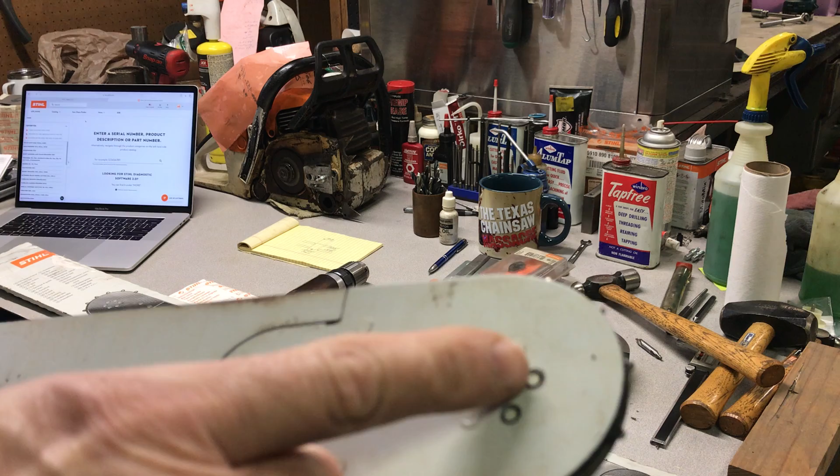All right, here we go. Take a look here, you can see that the sprocket nose has been pinched and then pried open. And we've got two broken rivets here, so this nose is worthless.

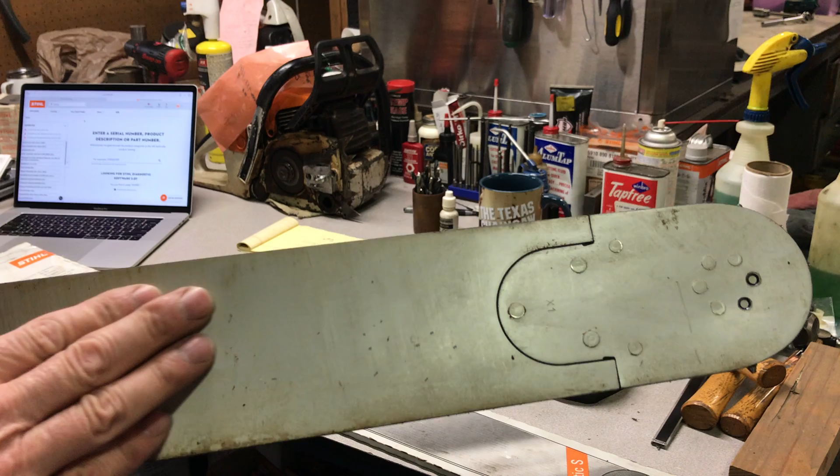This is what's called an ES Rollomatic, and RSN stands for Replaceable Sprocket Nose, which means we can replace this part and there's no damage to the bar body. The bar body is not bent, so it'll be as good as new.

Okay, we'll bring you in for a bit of computer work here. So we're in the parts lookup, and we pick chainsaws, then we pick guide bars. Let's take a look at ES404 right there, and this is a 41-inch, yeah, that's the right part number.

It doesn't have a nose number there. And we're going to go to, okay, number 1. So that's the part number for the replacement nose: 3003-650-2538, and that's what I've got here.

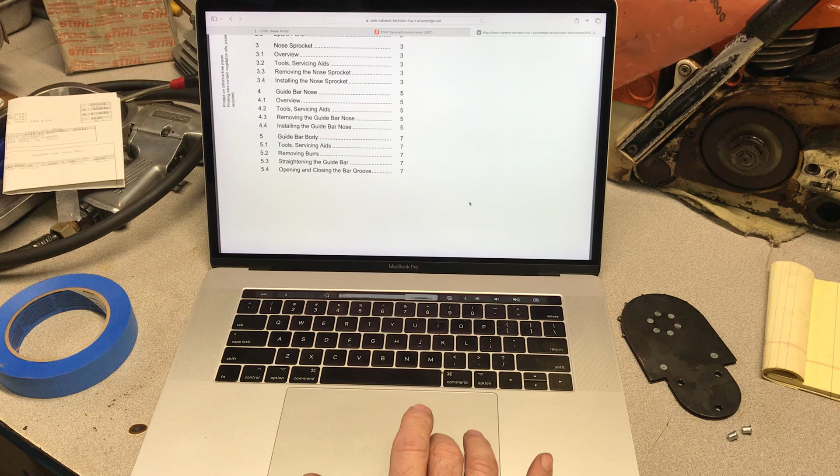And we can also go to Documents and pick the repair manual. I reviewed this, and this repair manual covers all the bars that Stihl makes, but we're just dealing with removing and replacing the sprocket nose, section 4.3, 4.4, page 5.

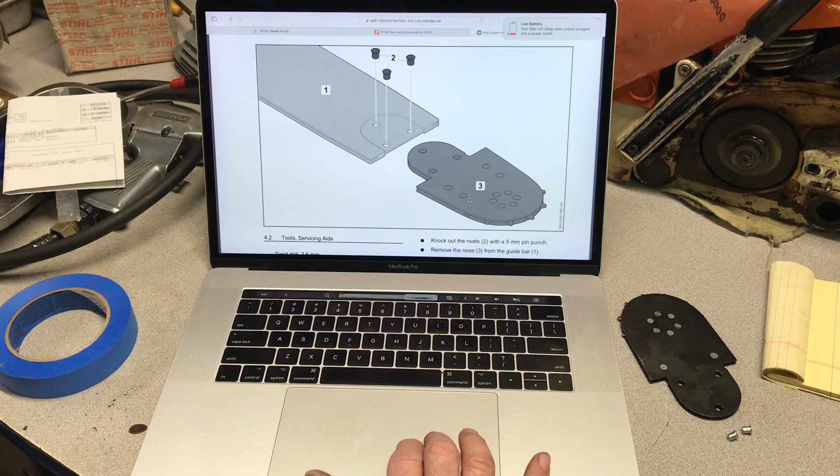All right, so we're going to be drilling these 3 rivets out and removing the nose. What they're recommending is using a 7.5 millimeter drill bit and drilling the head off of the rivet.

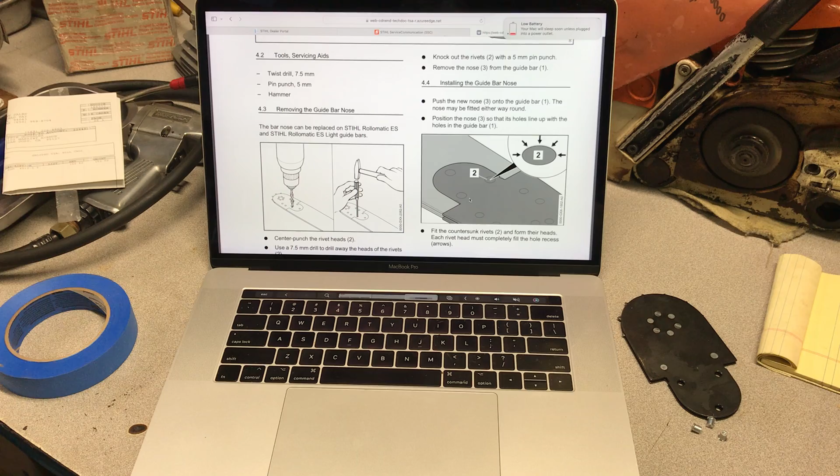I have an alternate method that I've used with great success, and I'm going to be doing it a little different than the way the manual shows it. What I'm going to do is, this little drawing here.

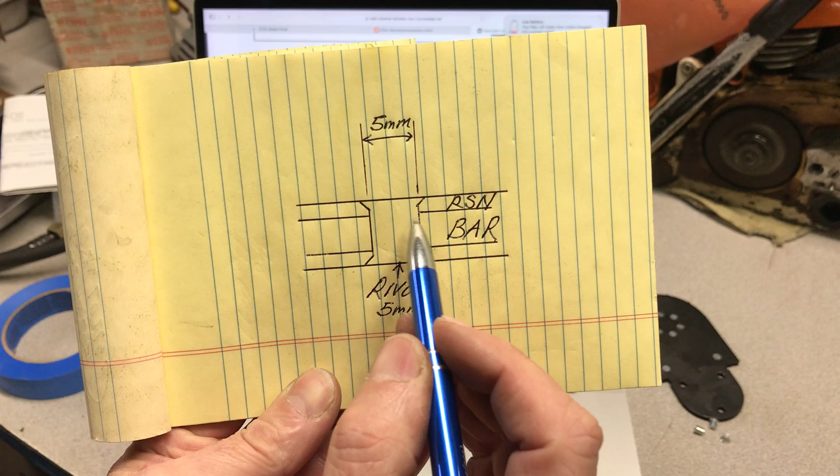I am going to be using a much smaller drill bit. These are 5mm rivets, and I am going to be drilling with something that's probably 80 to 90% of 5mm, and I'm going to be drilling not all the way through.

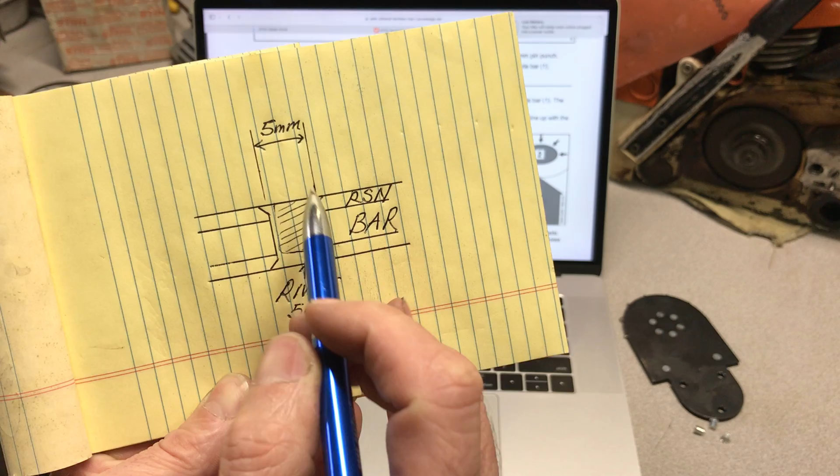I'm going to be removing this material, but I am not going to drill all the way through. And what that's going to allow me to do is make sure nothing comes into contact with the bar and damages the hole in the bar.

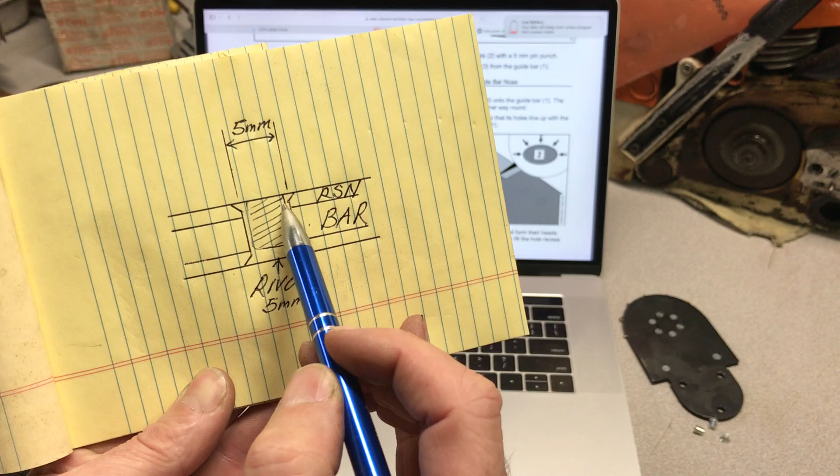I am going to use a pin punch, and this rivet head will break right here, and it will drive the rivet - the remainder of the rivet will collapse and come through very easily. So that's the method that I like to use over the other one.

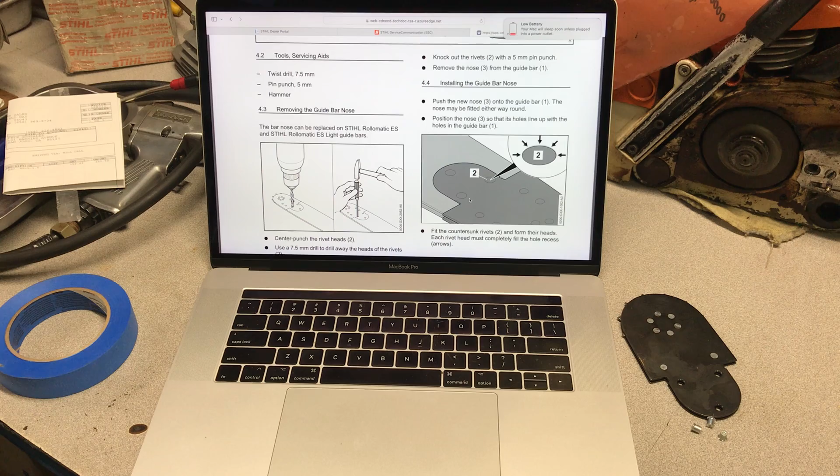This other method, there's a risk that if you drill too deep, you will actually be drilling into the bar body, and you don't want to damage the bar body. So I'm going to back up here, and we'll just go to work.

Got a bench block and a center punch. The trick to this is you've got to punch exactly in the center. Okay, that'll be good for starters.

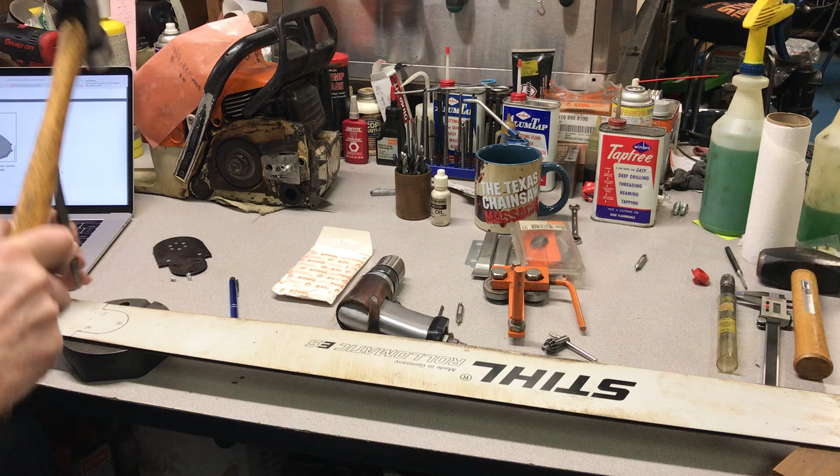And I'm going to make the dimples bigger. Okay, I'll bring you in.

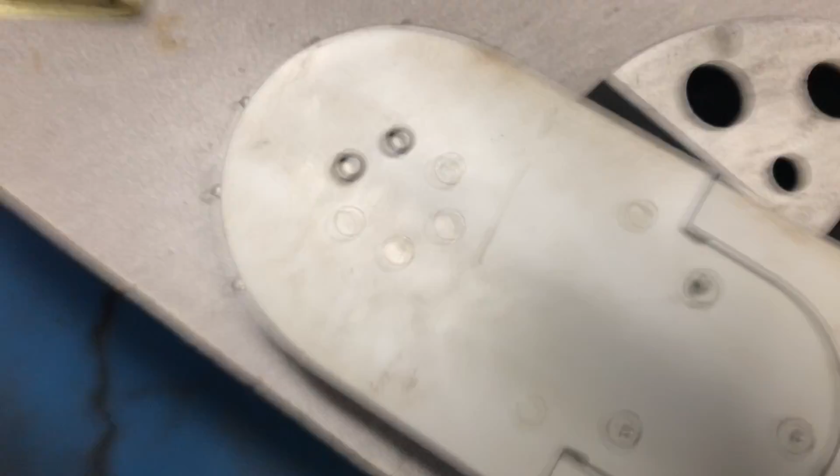Okay, so that's what it looks like before I begin drilling. Got them center punched right in the middle.

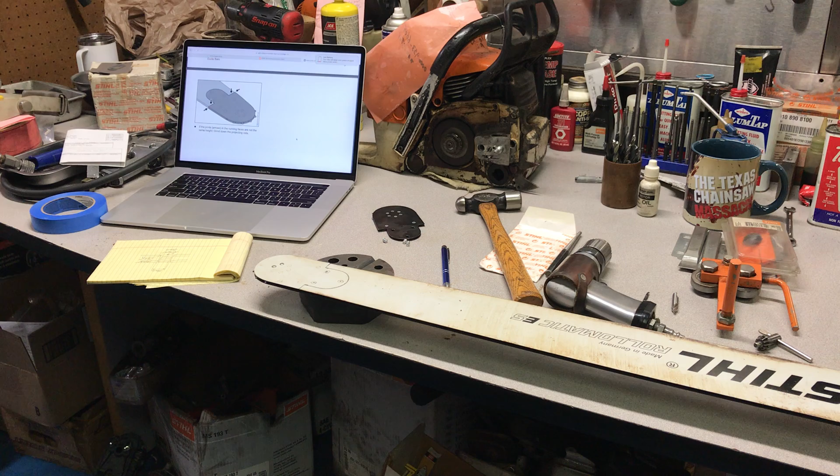Now, if I were to turn this job over to my other techs - some really lousy techs that couldn't do it if their life depended on it, it's Gomer and Dingus and Scratch - undoubtedly, if I gave them this job, they would somehow go crazy with the drill, go crazy with a sledgehammer, use a BFH on it, and destroy something. So this is the proper way to do it.

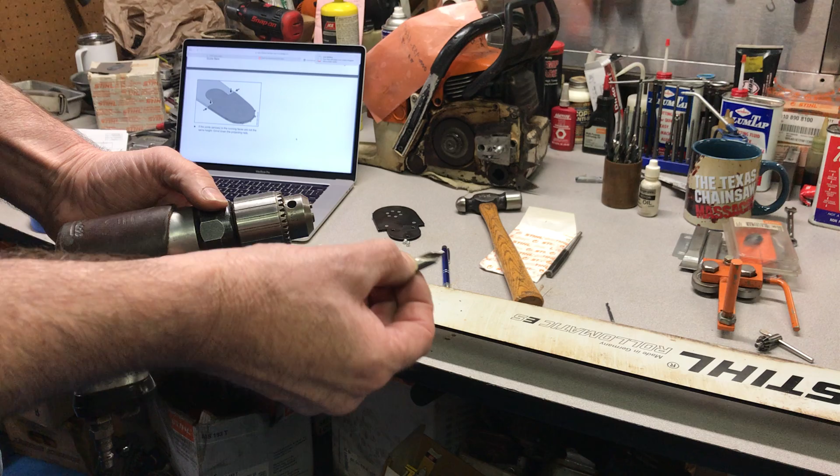To prevent the drill from walking, I am going to start with the center drill. The center drill's very rigid, and it's not going to walk around on you a lot, so I would definitely recommend getting some center drills if you do a lot of this kind of work.

Okay, that's the first step. Now I am going to switch from a center drill to a drill that's probably 4 millimeters - these are 5 millimeter rivets. I want a drill that is smaller than the rivet, and I am not going to drill all the way through.

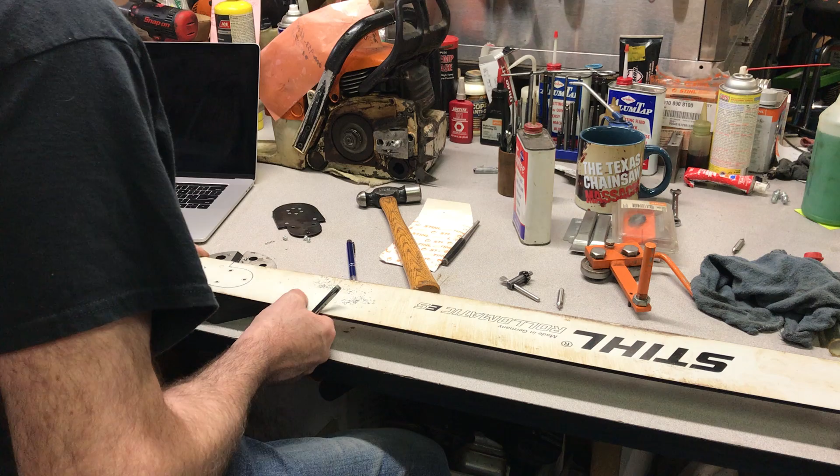At this point, we are going to use the bench block, and we're going to make sure that the recess in the rivet is over some kind of a recess so that it has something to drive into. And we're going to break the rivets.

All right, so the rivets are broken. By doing it this way, there's no possibility of enlarging these holes bigger than 5 millimeters. If it's done carefully, this is the way it comes off.

Got 3 brand new rivets. Here's the third one, was hiding.

When Terry brought this bar back after bending it in a tree, he immediately claimed warranty. Stihl does not manufacture bars bent like that, so there's no way I'm going to warranty that. Stihl's not going to pay for that. So if you don't use wedges and you don't know what you're doing and you bend up the bars, then you got to pay for it. That's the way it is.

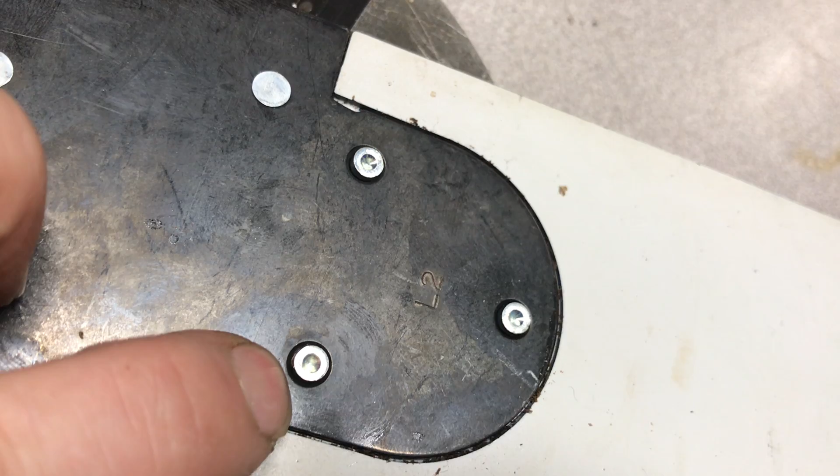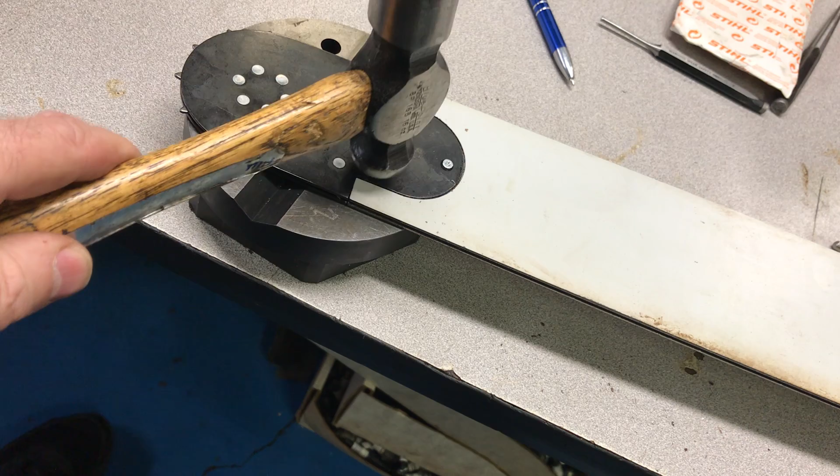Okay, so this is prior to flattening the rivet heads out. The rivet heads have a hollow spot which will help in the flattening out, flaring riveting process, so that the head of this rivet is going to flare out and match the countersink in the bar nose. This is why you have a ball peen hammer. You're going to use the peen end first, then the flat end to finish it. So that's what I'm going to do. I'm going to beat on the rivets.

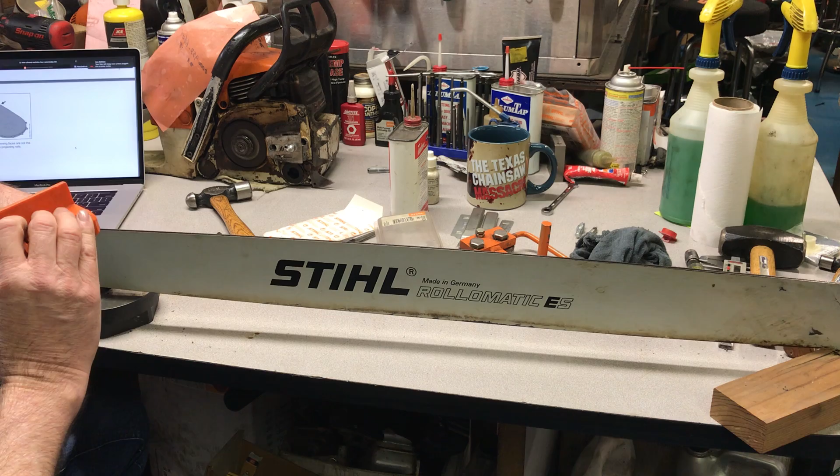Used quite a bit. You have to go in the right direction, which is this way or this way. And this would file the rails. If there's a high one and a worn low one, it would file off the high one until you get down to the low one and then even them out. So that would make the rails the same height.

Now, to account for a worn groove, these grooves will open up. I have a rail rolling tool. This is a Stihl tool, and it has two pretty big ball bearings on it, and it fits on the bar like so, and then the tension screw would apply tension to the bearings, and then you would roll this down the bar, and it would squeeze the bar rails back together. So that's how that works.

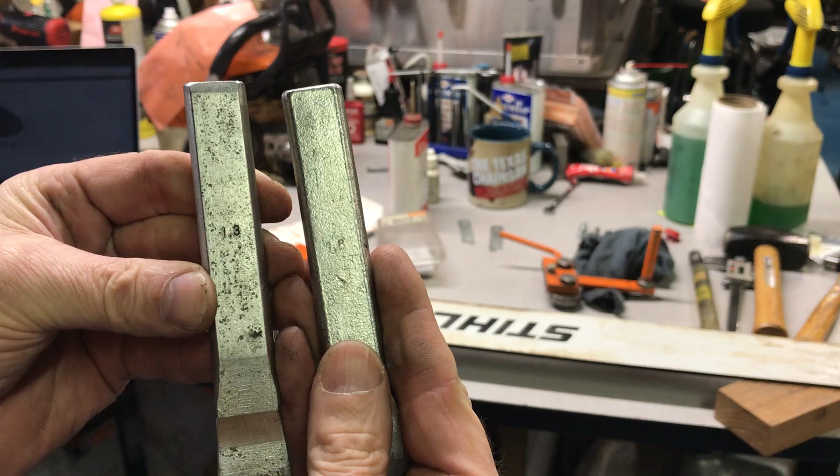That's not necessary on this bar because this bar is brand new. If you happen to roll it too tight and the chain won't go into the bar groove and slide back and forth, Stihl makes these tools. There's two of them: one is 1.3, 50 thousandths, and the other is 1.6 millimeter, 63 thousandths.

And those tools are shown in the service manual here. There's the bar rail filing tool, and these are the bar groove spreading tools shown in the book. You can put them into a pinched bar rail and drive them in with a hammer, and it'll open up the bar and get the chain to slide back and forth through there again.

There's also the older, more primitive method. Stihl makes these two, these happen to be Oregon, but one is 50 thousandths and the other is 63 thousandths, and you could put this in here and then use a hammer and pinch the bar rails that way if you didn't have a rail roller. The rail roller is superior. These are not quite as good. I'd like to use that.

And other than that, that's pretty much a done job. This bar is ready to go back into service, and hope the hints and tips help.